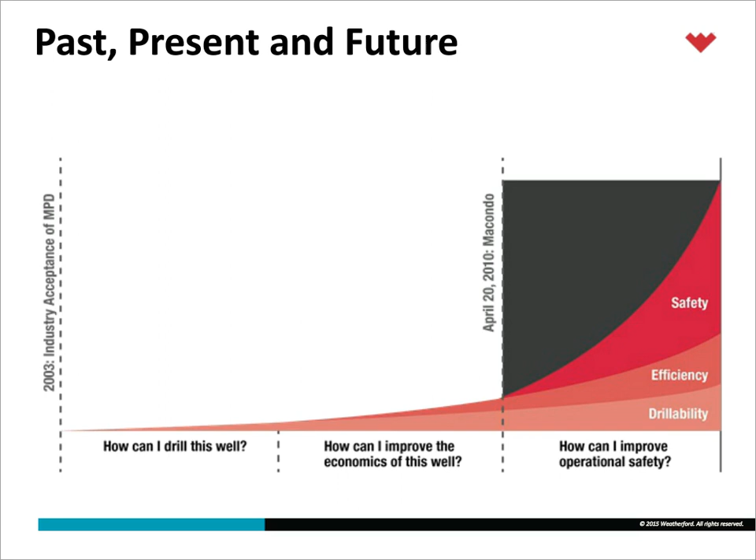So as we know, deepwater expansion with the new high-spec rigs really came onto the market pre-2013 and throughout that year, with some deliveries in 2014. And with this growth came the need for a new game-changing technology such as MPD. In 2014, the MPD market space hit critical mass, with the technology gaining considerable customer acceptance across most large basins globally.

So from 2018, we expect this growth to continue, or at least outpace growth rates of other similar drilling technologies, and grow to the coveted mainstream and become the new drilling convention for deepwater drillers.

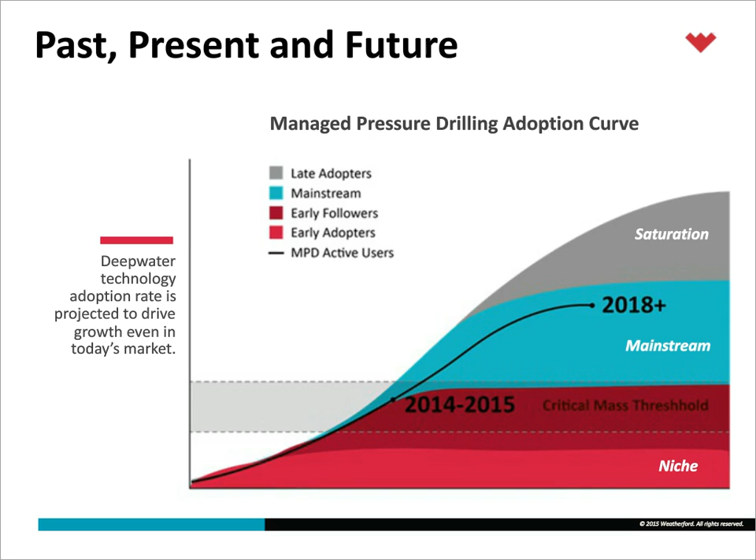So to highlight some of this move to critical mass, Weatherford has experience across all applications from land, shelf, and deep water, across all geographic areas where drilling challenges are prevalent. Leveraging our skill sets from 2003 and building extensive infrastructure has enabled this growth to occur. 236 land wells, 103 jackups, and 51 floaters in our portfolio on varying well types and drilling domains speaks to the future of the technology and mainstream adoption.

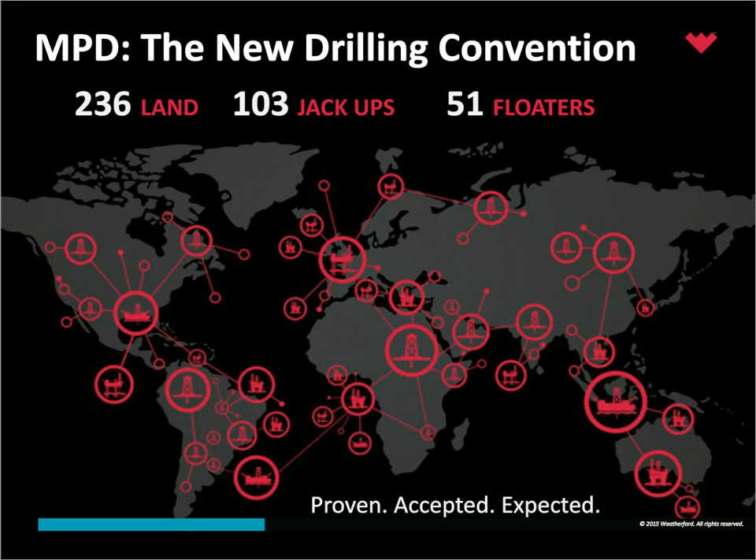So let's spend some time on today and some of the macro trends that are shaping the current environment that we all work within. Today's reality is clear. Well construction costs and risks must simultaneously come down. Non-productive time, wellbore stability, and unmet well objectives must all be addressed now and into the future.

So in basic terms, to highlight some of this macro environment, you often read in the public domain that easy reserves are gone, how non-productive time significantly impacts well costs, and how we as an industry must continually strive to better protect health, safety, and environment as a whole. All speak to the need for better technology across the find and develop process of our customers.

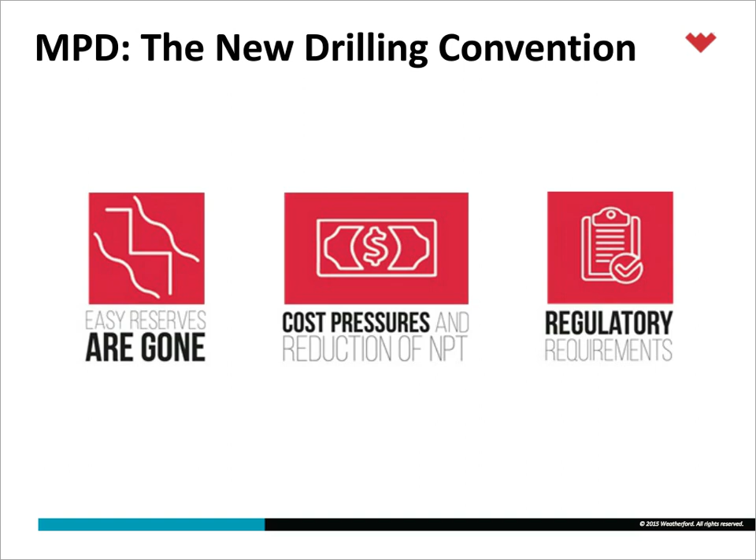So here are just a few examples of how commodity pricing impacts break-even costs for large fields, such as Brazil's pre-salt and other challenging fields globally. Today's pricing reality means that costs need to come down significantly if deepwater expansion is to resume. If you take Brazil Libra, for example, on your far right, $60 break-even Brent, 2014 run rate costs for that particular well need to come down 30% for this to be an economical play if we believe that $60 Brent is here to stay.

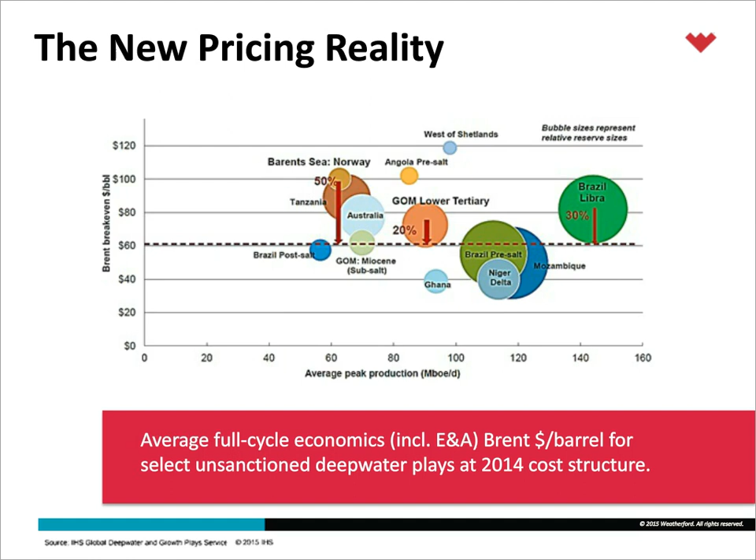And to highlight other concerns, if you look at almost the last decade and a half, production has not kept up with spend. In year 2000, annual spend was approximately $18 billion on the E&P side. Today's spend is over 110. This is a $90 billion difference. And if you look at the production curves, you can see minimal increases.

The actual increase is about 6 million BOE per day, which more or less equates to about 1% production increase if you compound it year on year, versus a 14% compounded annual growth rate on the E&P spend. Obviously, these two need to come together, and by driving down well costs, these curves should get closer together.

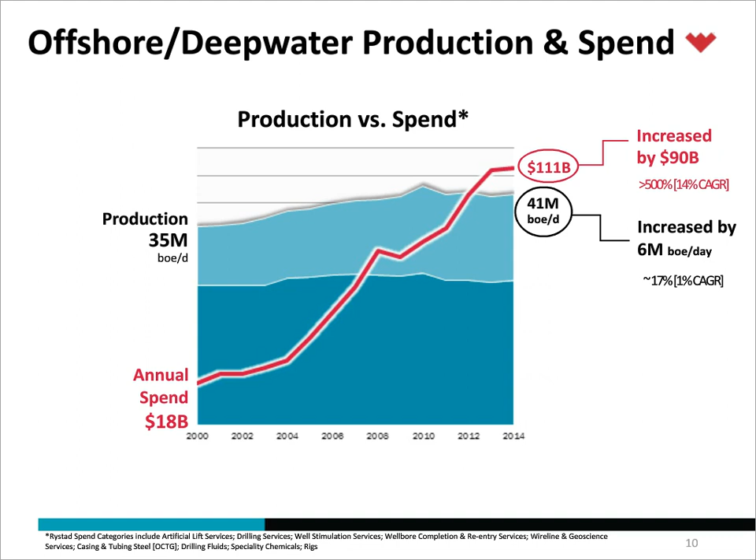So we spent a little time on how we lower well costs and highlight three key areas of opportunity to meet today's new pricing reality. Reducing non-productive time is one low-hanging fruit that can generally be addressed with new or better drilling techniques combined with new technology.

Improving drilling performance with new and better predictive and responsive technologies such as MPD is another area that can drastically reduce overall well costs. And improving well integrity and safety with additional flow control barriers such as a rotating control head is another opportunity for lowering costs.

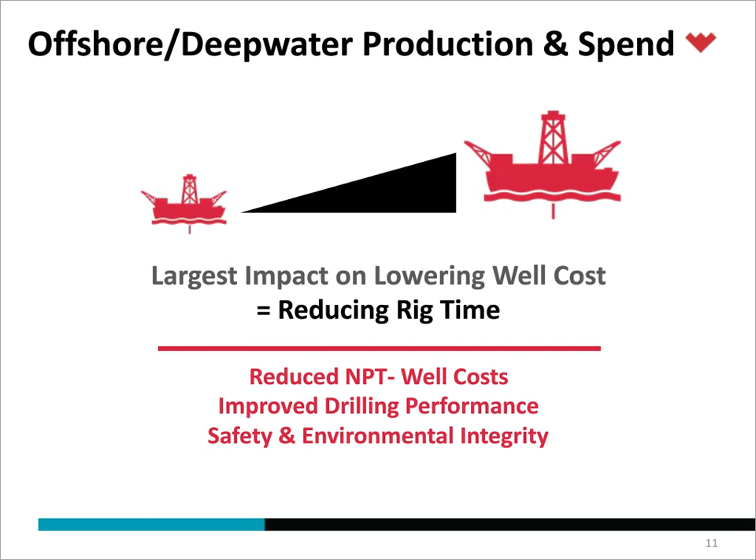So if you look at the Golden Triangle on your left, which is synonymous with Gulf of Mexico, Brazil, and West Africa, they all have numerous issues, numerous opportunities, and numerous risks that are associated with drilling in these environments. These include water depth. If you look at the water depth, it's changed considerably over the last 10 years, and even before that, in the last 15 years.

The geological complexity and reservoir characteristics also have changed, with rigs being built deeper to drill in these types of environments. So whether it's ultra HPHT, pre-salt, rubble zones, pore pressure, fracture gradient uncertainties, these complexities all add to the non-productive time and risk to an extensive amount of drilling operators.

So to highlight this further, if you look at the risk, you look at non-productive time, and you look at failed well objectives, they speak for themselves. 30% of non-productive time is associated with a typical deepwater well. 46% are down to failed well objectives, which could include reaching total depth, landing intermediate casing strings at depth, and/or losing wellbores due to kick-loss type scenarios. And in a post-Macondo era, risk can be easily quantified now.

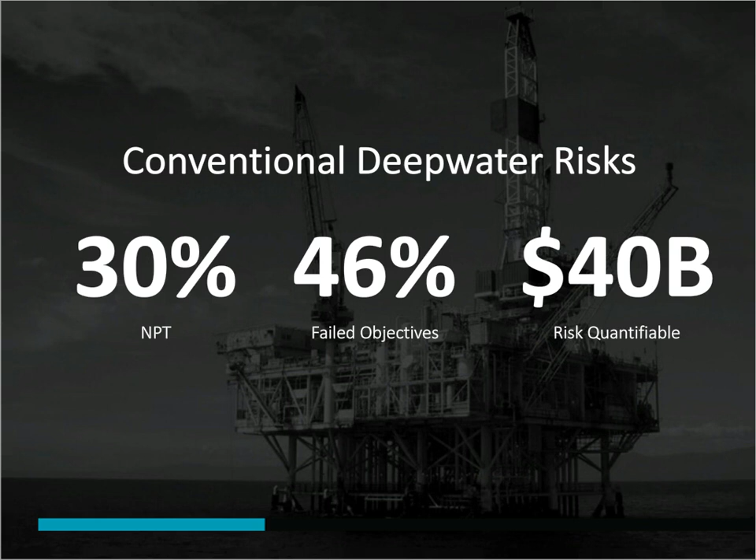So just stepping back a little bit and providing some further context and insight into the general market conditions, let's take a look at the current active market of offshore drillers. This is always a good activity benchmark when looking into the future. Contracted rigs stand at 81% and 84% for jackup and floating rigs respectively. Continued declines are also expected from the highs of 2014 as we move out into the end of the year and into 2016.

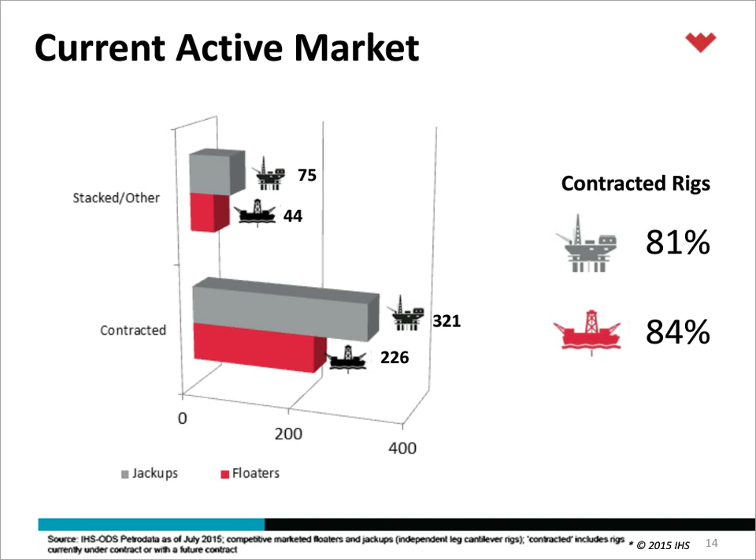However, when one looks at the new build market, the story becomes even more concerning. You can see the portion of available rigs is significant, especially when considering the new build jackup market. Why do I highlight the active and new build markets? I do this because not only is it a good general indicator of what's to come, but also to highlight the requirement for high specification assets that the customers will naturally demand when growth returns. I will touch on this later in the discussion.

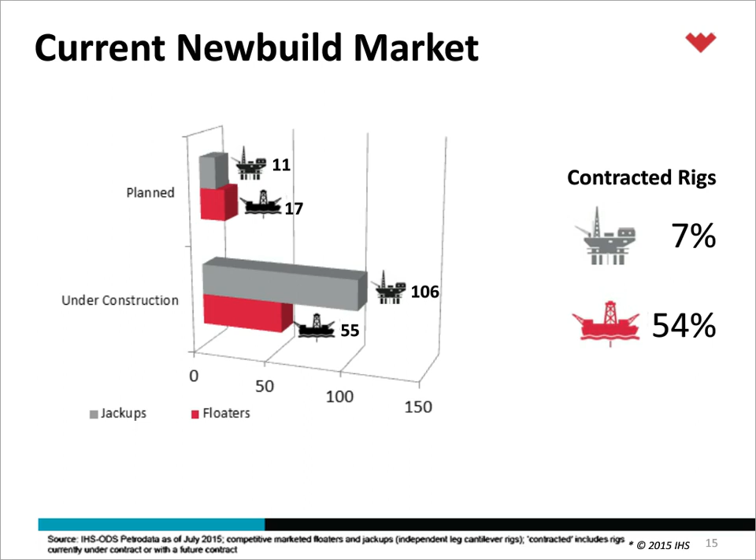So in summary, we believe deepwater is here to stay. However, day rates are declining and rig availability will continue to increase. Our customers will demand high specification drilling units in order for them to deliver wells safely and on budget. And key technologies that can assist in both, such as MPD, will continue the expansion into the mainstream and the new drilling convention.

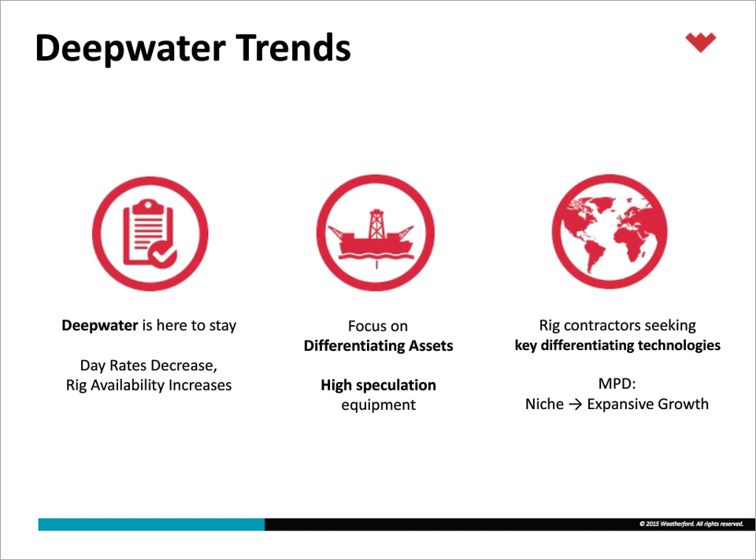Now let's spend a little time on how deepwater challenges can be addressed, again bearing in mind the high non-productive time and failed well objectives that are prevalent in this environment. First, let's spend time on what MPD is for some that are not familiar with the process. IADC's definition of MPD is widely accepted internationally: an adaptive drilling process used to precisely control the annular pressure profile throughout the wellbore.

This is achieved by surface back pressure adjustments, with the planned intention of avoiding continuous influx of formation fluids to the surface, unlike UBD. And if any influx incidental to the operation were encountered, it would be safely controlled utilizing the specialized equipment.

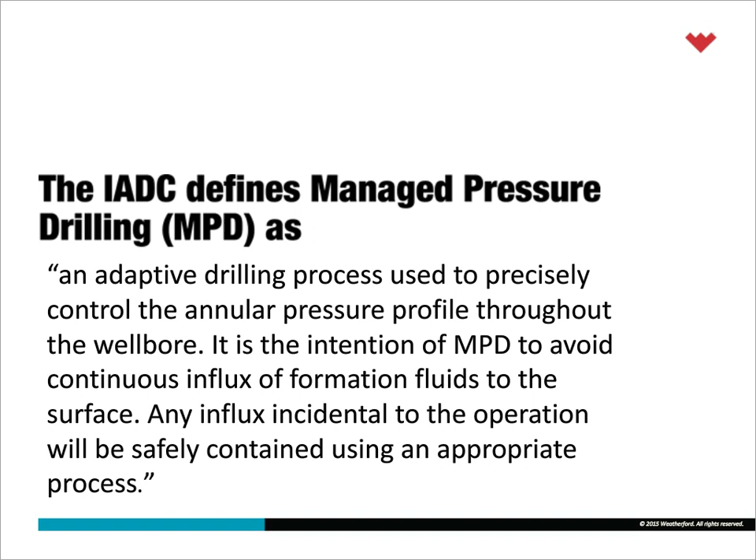So a few brief objectives of MPD. The first is to establish the downhole pressure limits to mitigate the risks and costs associated with drilling wells that have narrow and unknown downhole pressure limits. And two, proactively manage the annular hydraulic pressure profile, allowing faster corrective actions to deal with observed pressure variations, such as kicks or losses.

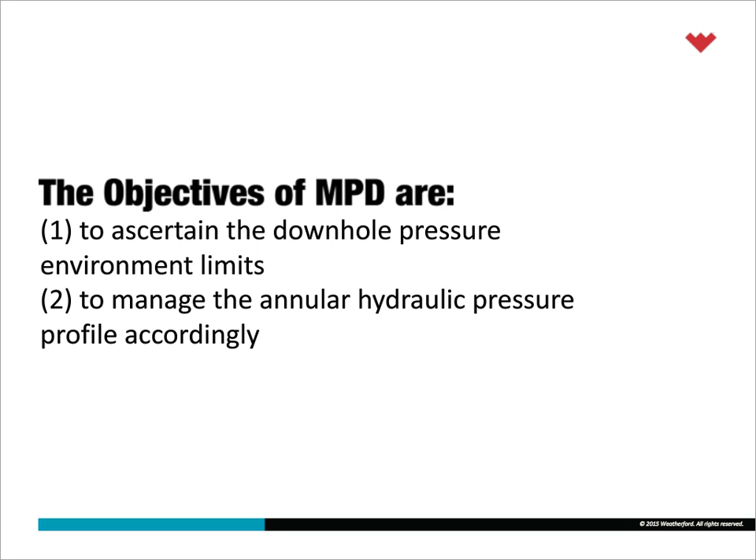So if you compare conventional drilling to managed pressure drilling, what are the differences? Comparing the hydraulic calculation of conventional to MPD applications, in simple terms, in conventional applications controlling the bottom hole pressure is based on hydrostatic pressure of the static mud weight plus the frictional pressure. And manipulation of the bottom hole pressure is attained by adjusting either the mud weight or the pump speed.

Fairly straightforward. On the other side of the equation, managed pressure drilling applies a closed loop system with the ability to hold surface back pressure. The bottom hole pressure is manipulated by adjusting the chokes with no need to vary hydrostatic mud weight or pump rate.

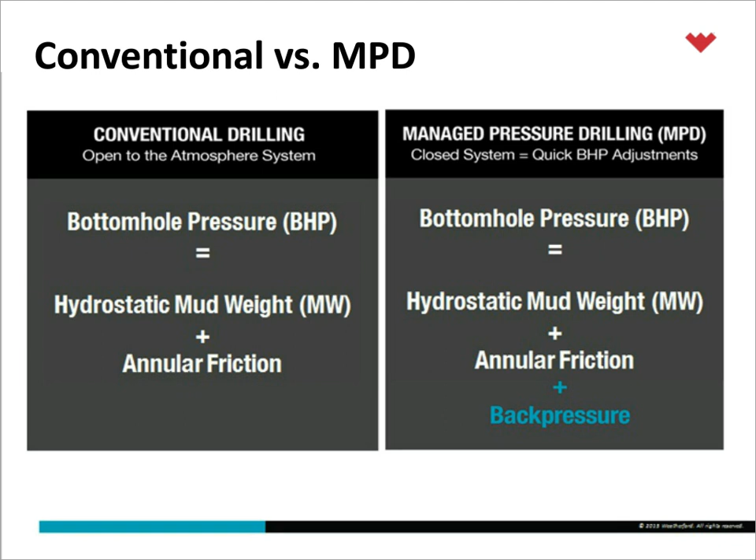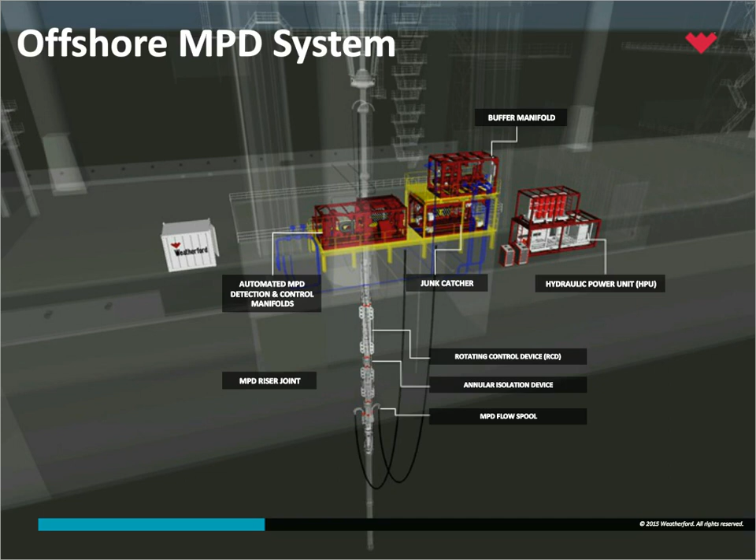So more on the RCD, one key enabling technology for use of surface back pressure. This device serves as both a flow control barrier between the well and the rig floor, but also enables fluid to be diverted back to back pressure devices for better control and visibility of the downhole environment. So as you can see here, a bearing slips in and out of the main housing, and the elements on the bottom provide the seal around the drill pipe and allow you to rotate as you drill ahead.

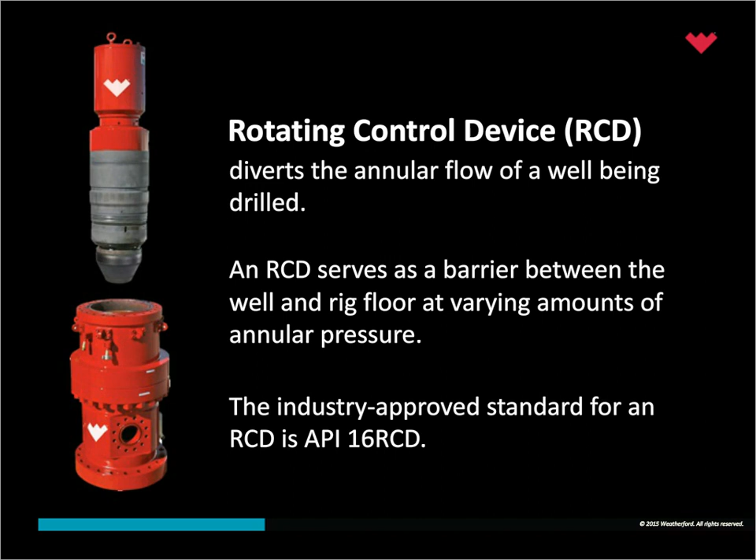So here's a picture of the automated Microflux control system. Again, one key technology that enables better detection and control of the fluid environment within the wellbore. Whether it's early kick detection and response, or trying to improve your drilling window by understanding pore pressure and fracture gradient values better, it is another key area of the technology in reducing non-productive time.

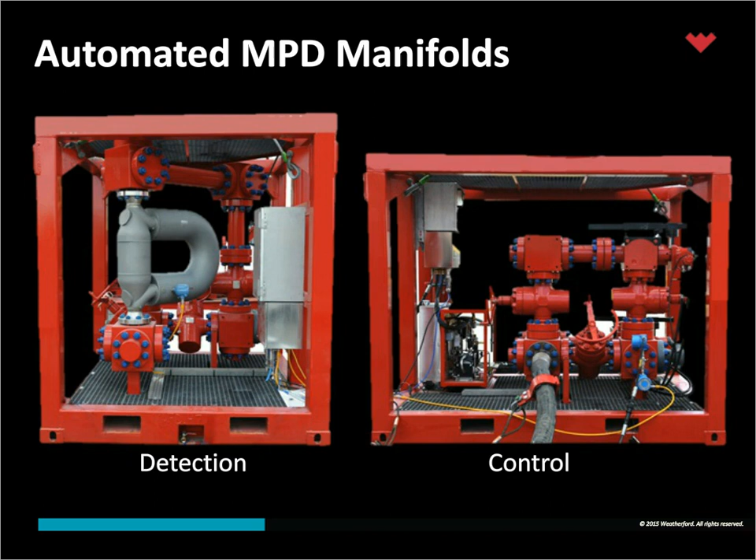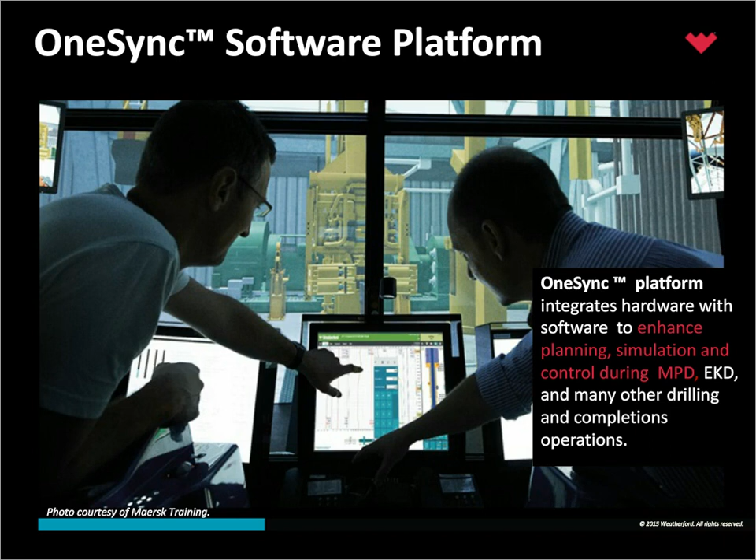So enabling this connection between downhole and topside equipment control, such as RCD and Microflux, our OneSync software platform integrates planning, simulation, and control during MPD operations. So what does this look like? This platform allows for seamless data integration from pre-drill models and planning through MPD operations and post-drill wrap-up. The value to the customer includes reduction of non-productive time due to drilling challenges, better quality wellbores, and improved drilling hazard mitigation while reducing costs and improving safety. Some examples of this would be early kick detection and constant bottom hole pressure for improved wellbore stability and hole cleaning.

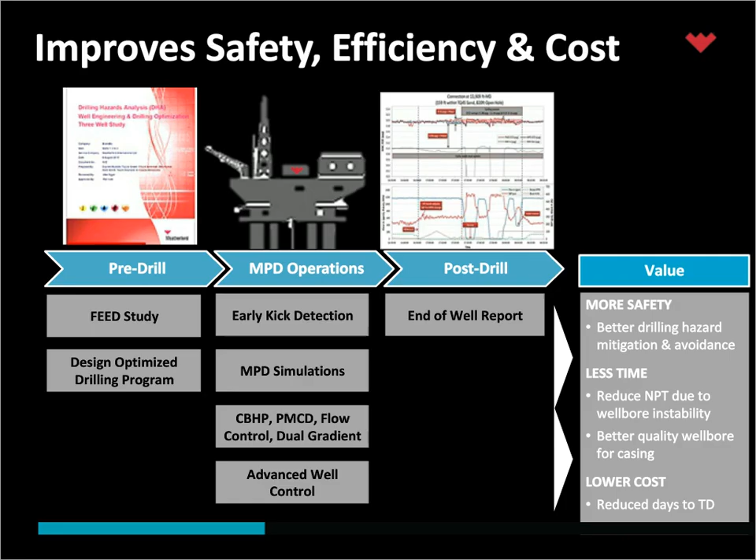So before moving more into the new technology discussion, let's summarize why MPD is important. As discussed, easy reserves are gone. Cost pressures are here to stay, at least for now, with regulatory requirements increasing, which also needs to be addressed. MPD overcomes conventional drilling shortcomings in environments such as deep water, where they're likely to fail. From a technical perspective, and in simple terms, MPD provides the ability for early identification of events, visibility, and ultimate control of the hydraulic drilling environment.

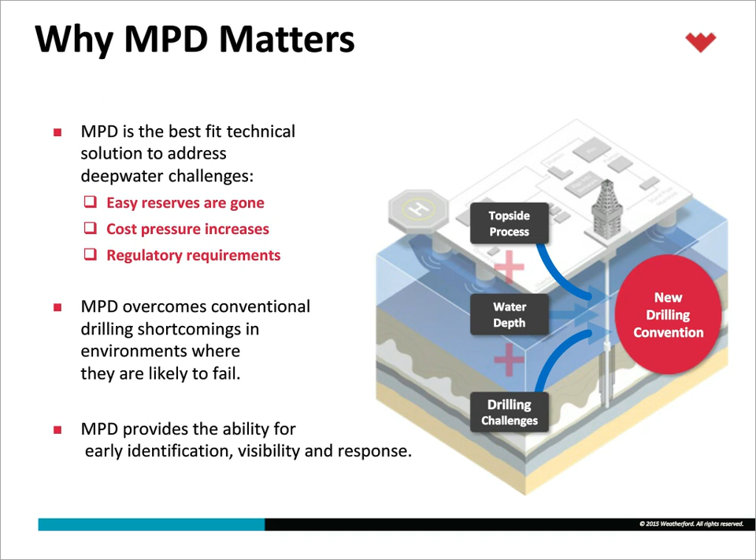So referring back to the first couple slides, and 2003 as the year for introduction of the technology, let's review how MPD's value has changed from early 2003 to where we are today, and how we see wide industry adoption occurring through 2018. So if you look at the undrillable portion, which really happened between 2007 and 2012, the customer really wanted increased safety and efficiencies. They wanted the benefits of it and didn't really look beyond drillability and getting their wells to TD. The market did move slightly then, but it was far from being accepted and would be deemed more of a niche technology. The conversation was contained to, how can I drill this well?

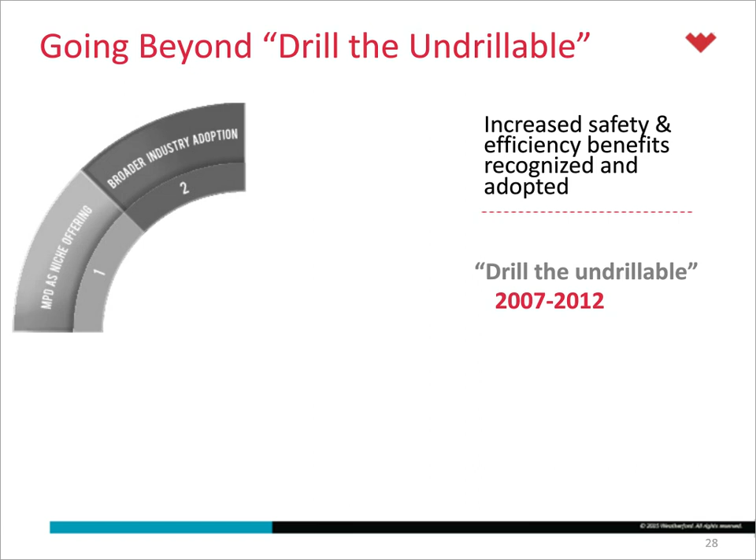So moving through the growth phase to where we are today, or at least in 2014, a term in the industry was coined with customers contracting rigs that they specified as MPD Ready. Although there is no definition to date on the requirements for MPD Ready, the expectations were clear. The customer saw the value of MPD and needed it beyond the undrillable wells. The lack of definition of MPD Ready led to limited systems integration, inconsistent business and commercial models, and ultimately higher costs for our customers.

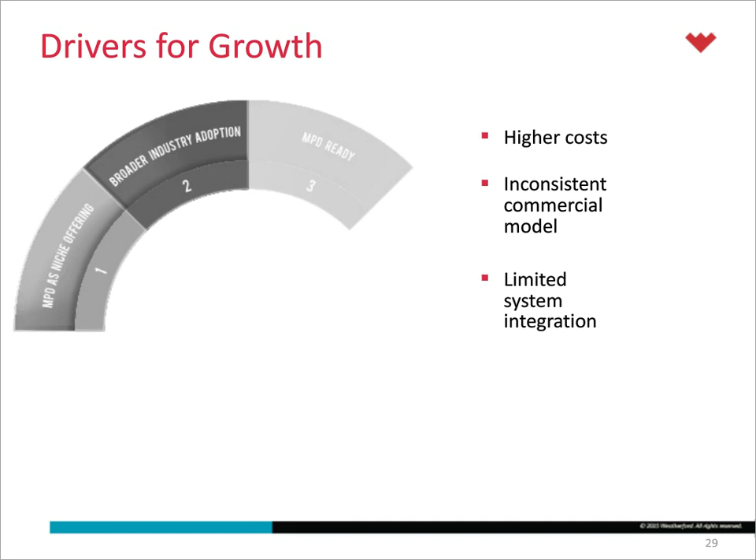So moving away from this system-based approach to a multi-service approach, eliminating complexity and enabling one platform to control topside through bottom hole will be imperative in meeting the cost objectives of our customers and moving MPD into the mainstream and the new drilling convention profile. Examples of this include providing fail-safe systems which are integrated and scalable to meet well control requirements, and reducing the reliance on human factors through automated response and control.

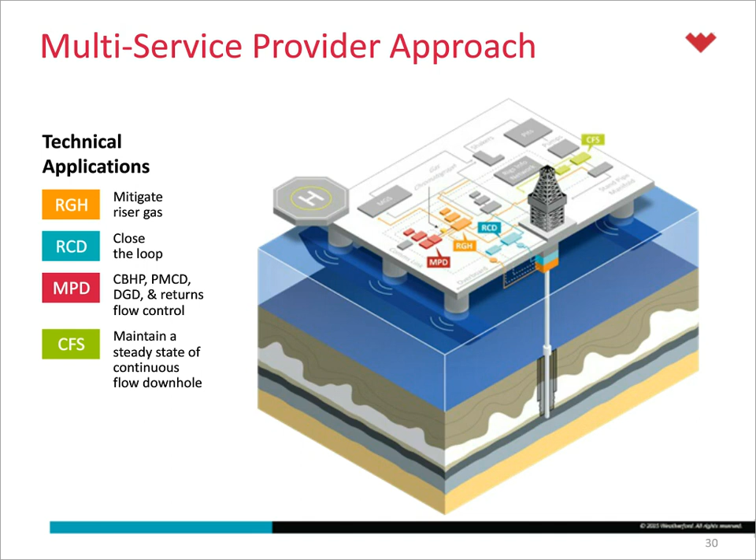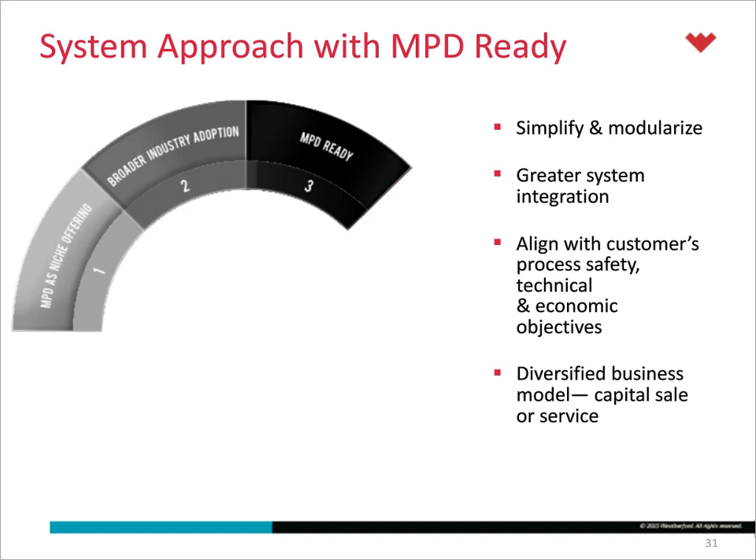Consider this being a coming together of business models that have been looked at separately. So fully connected products, topside through bottom hole, with the service and the equipment speaking together. So again, in summary, fully capable MPD rigs. What does this mean? Reduce implementation timeline. This would be rig up, deployment, and everything associated with what happens on the rig. Reduce complexity with a system approach. Again, topside through bottom hole.

Reduce operational risk. Reduce financial risk and human factors, leading to more automation. Better data and interpretation and response from a geological perspective. Reliability and solution-based, from equipment to people that are on the rig. And ultimately scalable, integrated technologies, topside through bottom hole. One size doesn't fit all, but in terms of scale, we can tie in with our OneSync software platform, and then scale based on the need of the well, whether it just be a rotating control head or riser gas handling and microflux.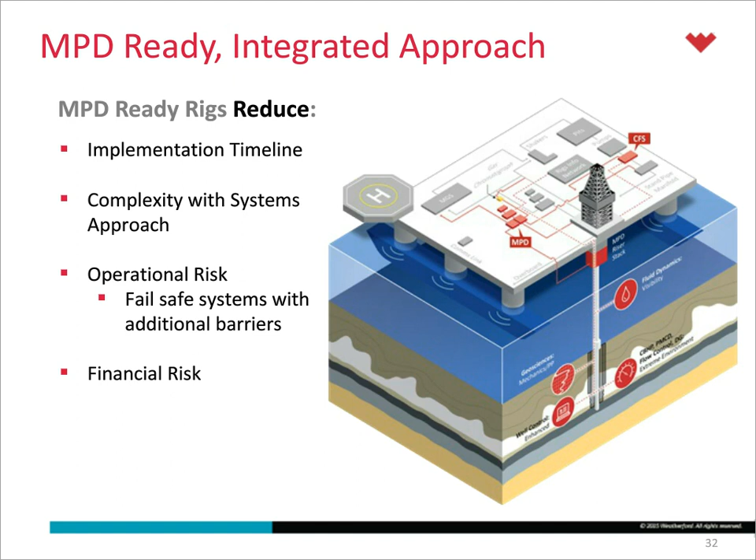So moving beyond MPD and utilizing the same approach on a system integration level, enabling one drilling control system will be key in achieving the objectives of our customers and ensuring they meet their cost, risk, and performance objectives as we go forward. Integration of the MPD application with hardware through one unified platform will be key areas of development for us now and into the future.

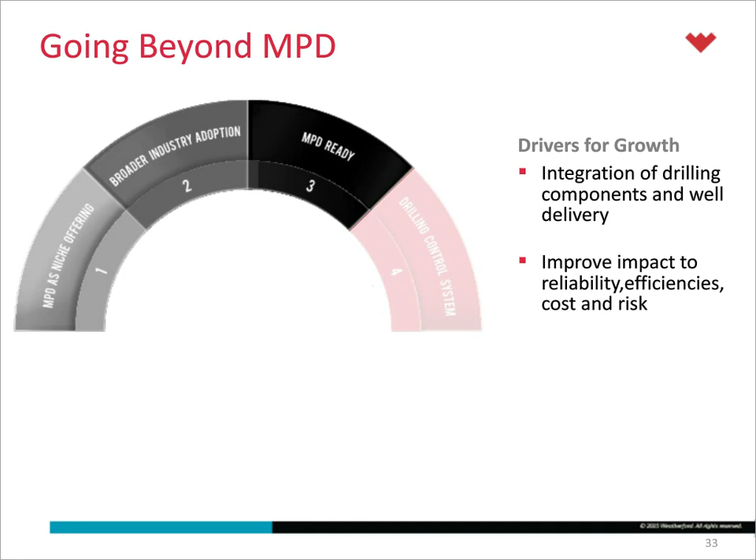So aligning objectives and providing a system-based or integrated MPD offering will move the technology from critical mass to mainstream in the coming years. MPD will continue to address customer risks and costs through this integration process. The removal of the multi-product service line approach will reduce complexity and ultimately improve reliability and efficiencies throughout the entire drilling process.

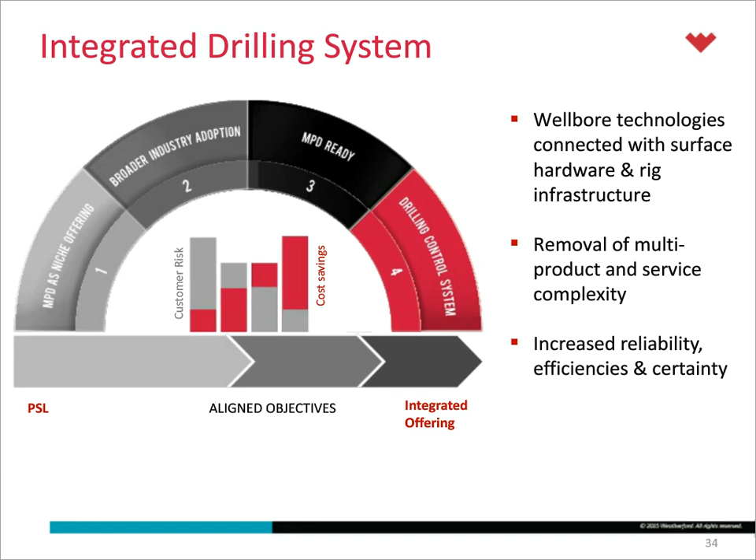So to give you some idea of key focus areas in terms of technology, this includes, I touched on it a little bit already, one drilling control system, having the equipment and the service and the application connected. Again, having that space where we can leverage our experience with MPD and build and grow and tie in more drilling hardware to improve the drillability of the well. Enhancing well control. We're doing this now. We do it often based on some of the wells that we're on.

So enhancing well control in the sense of early kick detection, improving that capability, which we have today, but getting better with it in terms of accuracy, understanding kick dynamics and well control dynamics, automating the processes where they make sense and where our customers are comfortable with, which again we do have experience in terms of circulating kicks off bottom automatically.

And then enhancing our geoscience expertise in terms of subsalt, pre-salt, and some of the other complexities that are associated with some of these deeper rock types in deepwater drilling. And then ultimately moving towards gaining full understanding of drilling efficiencies and how it impacts our customers and how we can impact overall well costs.

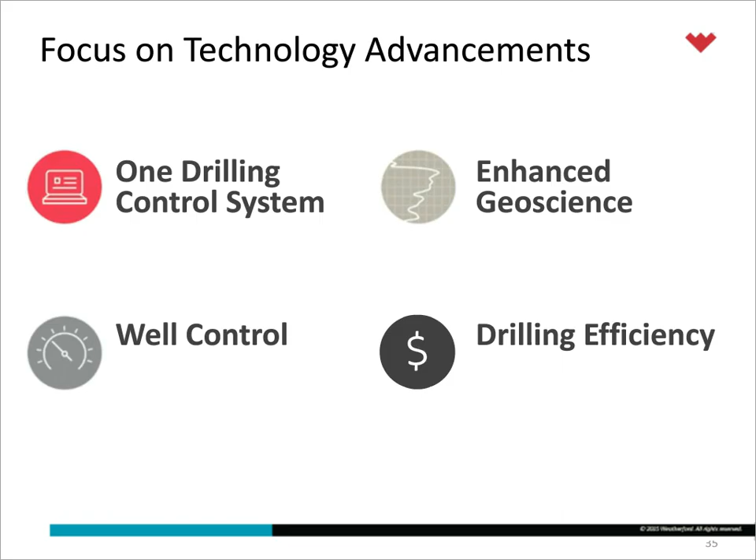So before moving on to the Q&A session, I'll spend some time on our OneSync software platform, and again on how technology connects the hardware and software through a seamless user interface. So the OneSync platform has really been built on the learnings of our business being in the MPD space for over 15 years, and obviously on a worldwide basis as well. So really starting from a trend monitoring perspective through analysis and control and building towards optimized drilling processes, this is really our target

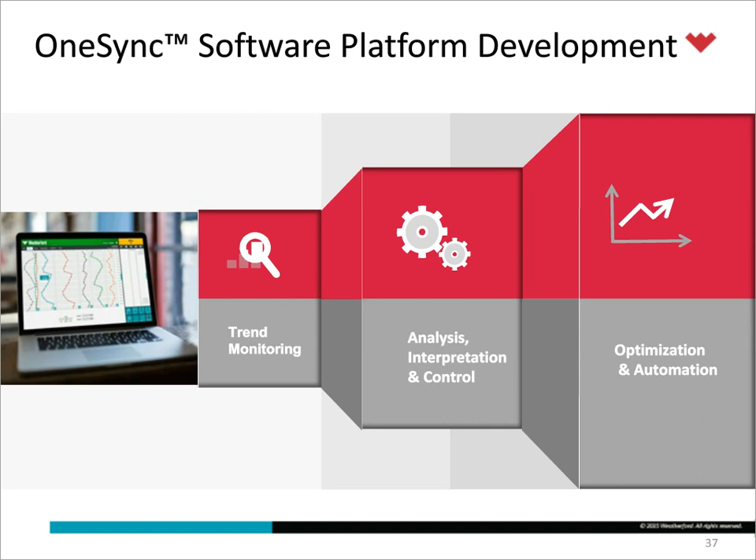and key objective. Building on our analysis, interpretation, and control expertise is really a natural segue into further optimization of MPD and other drilling functions, including automated processes where practical, to drive further efficiencies into the well construction process. So in short, OneSync enables the operator to trend, analyze, predict, and ultimately control the wellbore from one single user interface. A significant step forward as compared to the multi-product service line approach.

So an example of the OneSync platform is our well planning software, which is closely tied to the operational components of our MPD system. This platform was built with MPD in mind, and whether you are using pre-drill or real-time data, it can easily be moved from one application to the other, eliminating duplication and the need for multiple data sets. An additional benefit of this platform is the model engines are combined, ultimately improving pre-engineering simulations and planning.

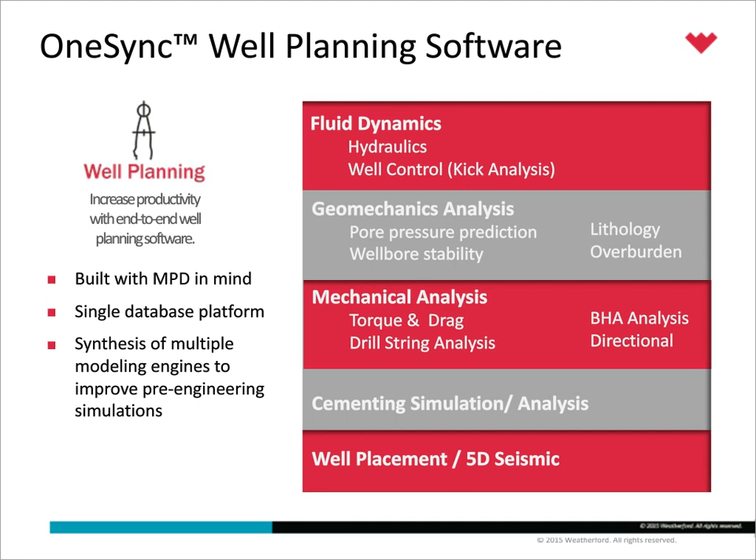So the features of OneSync are many, but one key and exciting feature is the ability to model at both the rig or the office. This modeling can occur as you are circulating out a kick, for example, in real time for better understanding of phase dynamics or simple visualization of where the kick is in relation to surface. The user can also predict events ahead of the bit and what-if scenarios as the well is drilled. Some of these real-time engineering tools include hydraulic analysis, formation and pore pressure prediction, and wellbore stability, as well as fracture pressure calculations, as well as torque and drag and buckling analysis, to name a few.

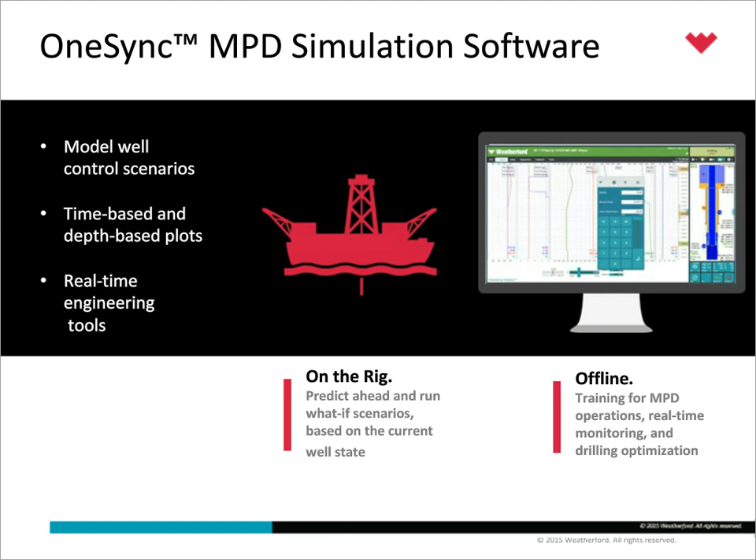Again, reiterating our belief for the new drilling convention and the technology moving into mainstream adoption, in order for us to meet this target, training and competency of all personnel will be crucial. To address this, Weatherford has entered a partnership with Maersk Training to deliver comprehensive competency and well control training for MPD personnel worldwide. The program will fully integrate the OneSync platform into the MPD simulator for scenario-based training, such as well control. Maersk Training has officially opened their offices in Houston, amongst others globally, and will provide us with the ability to use scenario-based training for rig crews and MPD personnel. This, we believe, is a significant step forward for wider industry adoption of the technology.

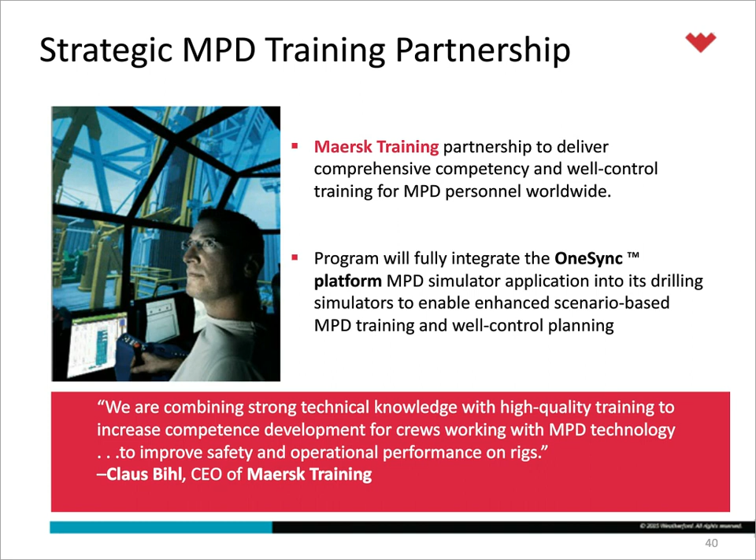Lastly, on the OneSync software platform, we can integrate the functional requirements of all the equipment installed on the rig for the purposes of MPD from one common control system as dictated by the desired application, whether it be constant bottom hole pressure, pressurized mud cap drilling, returns flow control, or drilling with continuous flow. The wider capability of this enhanced software platform will bring together the surface operating capabilities with the subsurface requirements as deemed necessary by the geoscience and drilling engineering departments.

In general, the software has the capability to perform pore pressure and fracture pressure prediction, provide an analytical tool to determine torque and drag, and a hydraulics module which will allow the drilling engineer to simulate any hydraulic function, including simulating and monitoring kick dynamics. These are just a few examples of the capabilities of this new and improved MPD system.